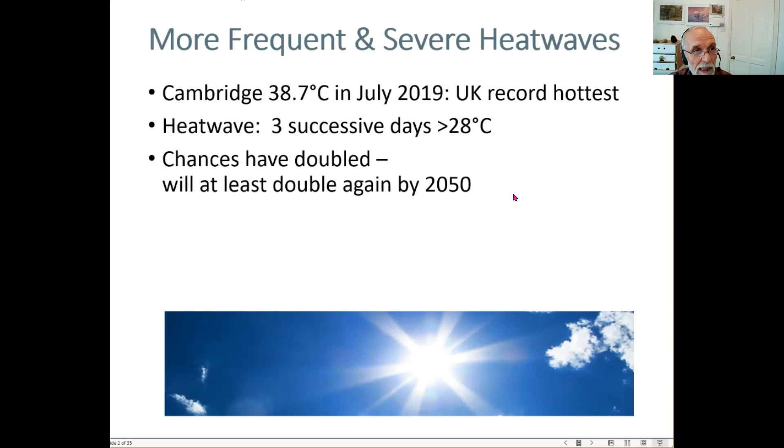The chances of heat waves have about doubled in the last few decades, and the prediction is that they will at least double again by 2050. And that's just the number of heat waves, the severity of some of them will go up again.

In 2020, there were over 2,500 deaths in England. I shouldn't be cheery about that, should I? But it's serious, and I don't want to make light of this.

We will be featuring some advice from NHS on how to keep safe. And when we have bad heat waves, we need to expect what they call cascading problems - there will be problems with health and social care.

Older people especially will be vulnerable, and children. There will be problems with transport because most of our roads are made with tarmac that melts above 50 degrees. 50 degrees may sound really hot, it's a lot more than the air temperatures I've spoken about, but dark roads will get a lot hotter than air temperature if they've got full sun on them. And electricity, business, wildlife and so on will also be affected.

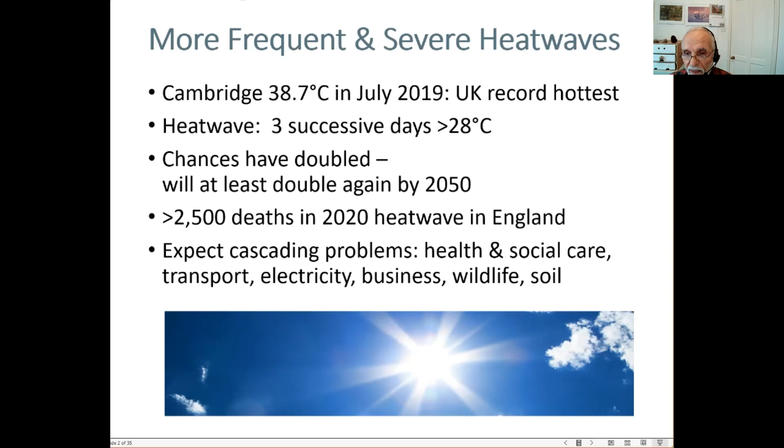Okay, right. So I'm Margaret Reynolds, and I call myself a green architect. After many years of practice, I did a master's in environmental design and building physics. For the last 20 years I've been promoting green design, with AC Architects from 2006, and then in my own practice, and I'm now a retrofit coordinator.

So we're covering a whole range of topics. Thomas just talked about the more frequent and severe heat waves, and I need to just review a couple of basics because these will help when we're looking at different house situations.

Right, so some basics about shading. Materials absorb heat, and they do it in different ways, and we call that the thermal mass of the material. I'm going to look at that, and also the seasonal and daily sun on your house, because that is part of what you'll need to consider if you're going to try and keep it cool.

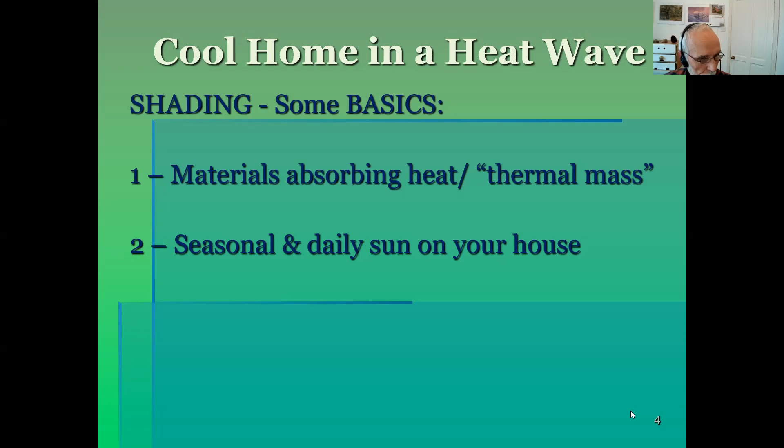So dense materials - concrete, brick, stone - absorb more heat and solar radiation, and then release it slowly. We say that they have greater thermal mass. They hold energy.

Metals, for example, absorb and release heat very quickly, so those we call conductors. Something like insulation foam or timber generally absorbs much less heat, and we say that they have less thermal mass.

Now, another thing about materials is that glass, even if it's double or triple glazing, transmits heat. And surfaces can reflect heat - if you paint your roof white, you will get less heat coming through it than dark. Foil reflects heat, so if it's on insulation, it reflects the heat. And solar film on glass can reflect the heat out, or it can reflect the heat in.

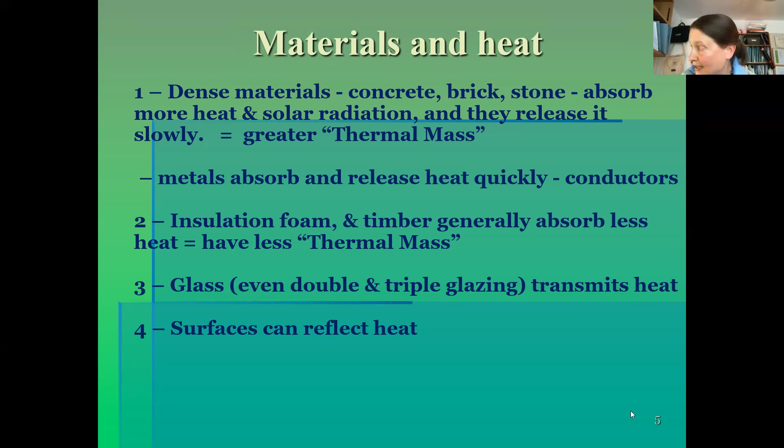So assume your house or a room in your house is cool on the morning of a heat wave. How does that heat wave heat actually get in to warm up your house? Windows are a likely route in, but how?

If the window is closed, the sun still shines through the window, as in the diagram on the left. If this direct sunlight gets through the glazing, it will shine on and be absorbed by any surface it reaches. As you can see on the photo on the left, you see the sun patches there on the floor, on the cushions.

Patches of sunlight - this surface will absorb the heat and then radiate it back into the interior of your house, and it will do that long after the sun has moved around and the window is in the shade.

So on the right is that same space with the Venetian blinds blocking the sun path. It's not making it dark, it's just blocking the sun, and all the sun patches have disappeared.

So for me, rule number one in a heat wave is we want to block what we call direct sun - that is the sun beams getting in and heating surfaces inside the room. So if early sun is absorbed by surfaces in the morning, this could cause them to radiate heat back inside the house for the rest of the day.

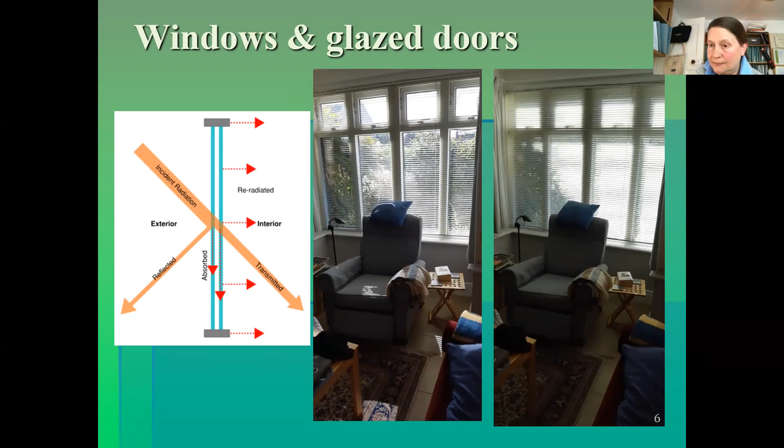To stay cool, you need to know which parts of your home receive sunlight when - by that I mean which part of the day, and I also mean which season. In this diagram at the bottom there's a building in the center, a tall one, doesn't matter. The north side of the building is almost always in the shade. On the east is the morning sun, and on the west, afternoon sun. The south tends to be much more sunny than the other directions.

In the winter, the sun path is low, so it starts in the southeast and moves to the southwest - that's the orange curve here. And in the summer, it's high - it moves from the northeast to the northwest at a high angle, and that's the red curve.

This is going to be important if you want to keep out direct sunlight. You need to know which windows you need to shade in the morning, the afternoon, and before bed. In effect, low-tech cooling like this requires developing a heat wave routine.

The other thing that's useful to know is the outdoor temperature, or at least whether it's cooler outdoors than in. This is important for natural ventilation, as you'll see - we do not want to be accidentally sucking that hot air that's outside into your house during a heat wave.

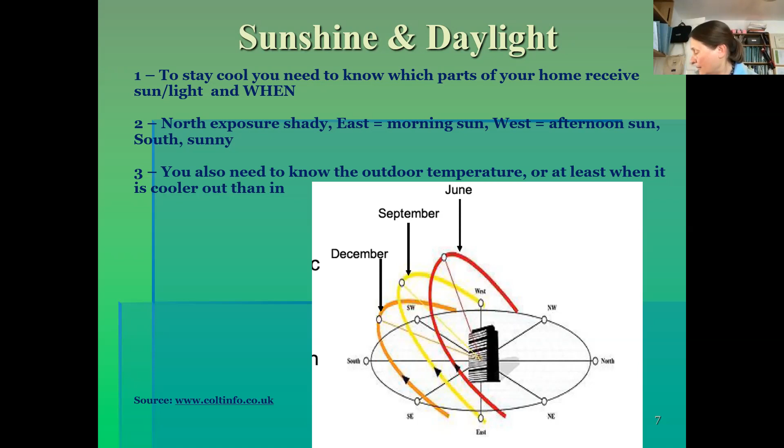So the simplest way to shade is something like roller shades or curtain fabric over the window. But then these don't satisfy my criteria - I want to be able to get light in and I want to see the view outside, but still keep the heat out. So an alternative is blinds.

Venetian vertical blinds with slats let some light in and they can allow some view out. Horizontal blinds, that is Venetian blinds, can be angled to deflect the sun, but bring plenty of daylight into the room and also permit a reasonable view out.

So here we have blinds that are closed, and then here are some that are deflecting the sun, but we can still see that there's shrubbery and things outside. And again, here's another example of a roof light that could have horizontal Venetian blinds.

However, with blinds, there are a fair number of moving parts. These have to be maintained, they have to be cleaned. And the blades themselves heat up in the sunshine, and because they're inside, they transmit that heat into the room.

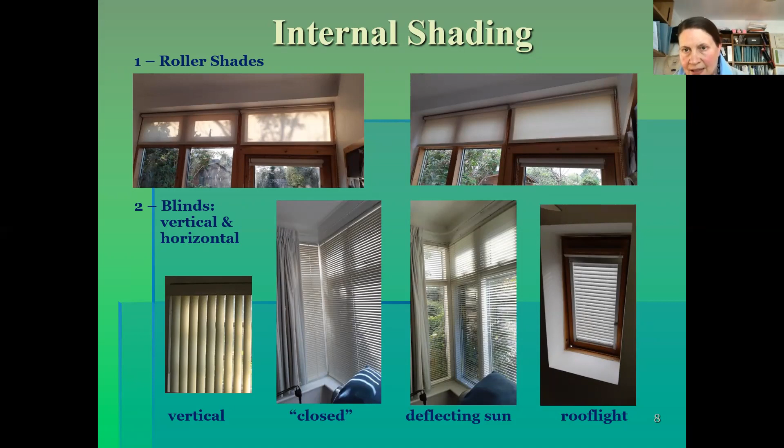So let's keep looking at this - here's some horizontal blinds that are closed. This shows you that in summertime, when the sun is high, the sun and its carrying heat could get in when you think the blinds are closed. That's what I'm saying about being at 4:30 in the morning - you really need to set those blinds to block the sun early.

In this case, if they're closed, you've got no view out. And if the sun gets on the blinds, they will heat up and warm the room as well.

So here we are with blinds horizontal - you can see out. Some of the sun is coming and hitting the blinds and being reflected onto the ceiling, so it's helping with the situation. If you set the blinds to block the sun, then you're only reflecting a tiny bit there. Your view is less good, but if you're standing up, you can tend to see out anyway.

So we'll see there are many reasons for having internal blinds, but there are also limitations.

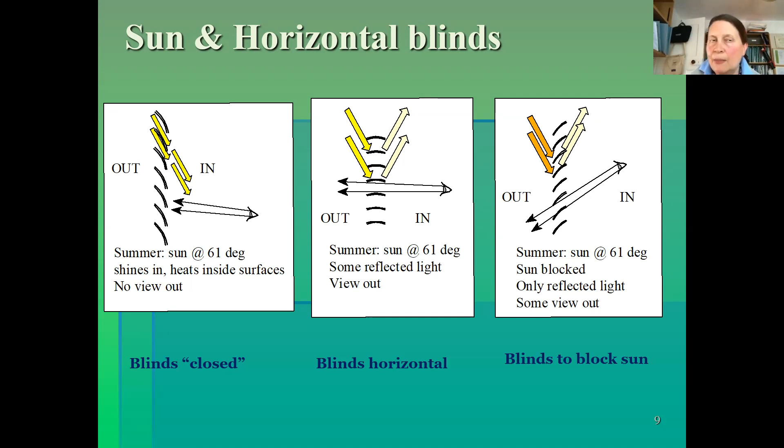In the UK, inward opening windows are very rare. For whatever reason, shutters are expensive in this country. They're very common on the continent, but we don't often find them here.

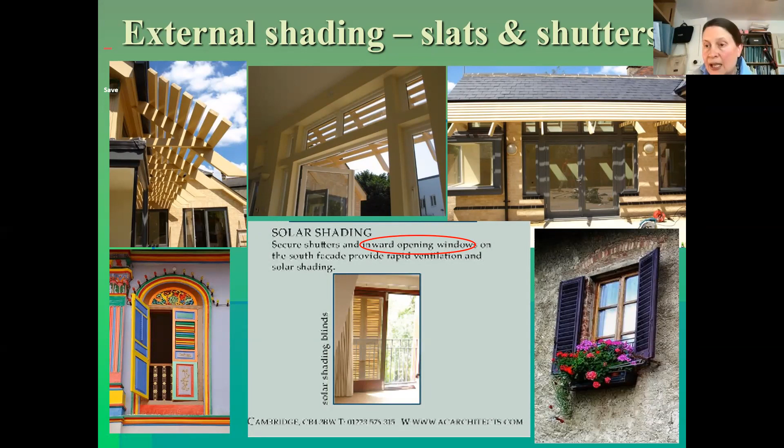So these awnings stop the heat reaching the window frame and the glass, but they still provide light and a view. And often it is at roof level that we get the most heat coming in.

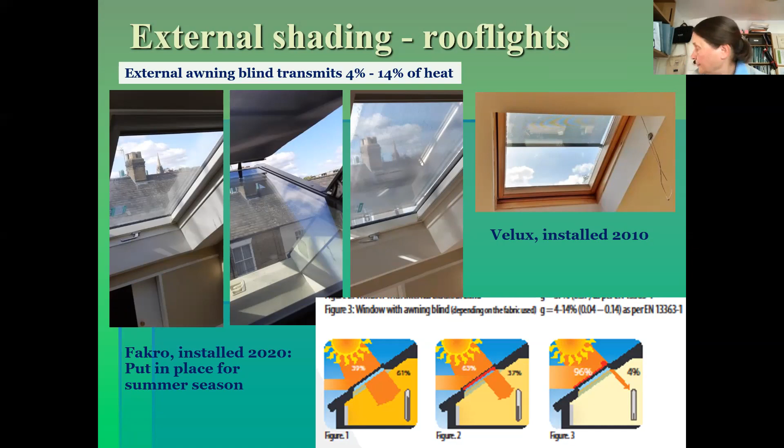External awnings for windows made of see-through heat blocking material like this mesh are not easily obtained in this country, although we are continuing to pursue this. Here are some alternative solutions.

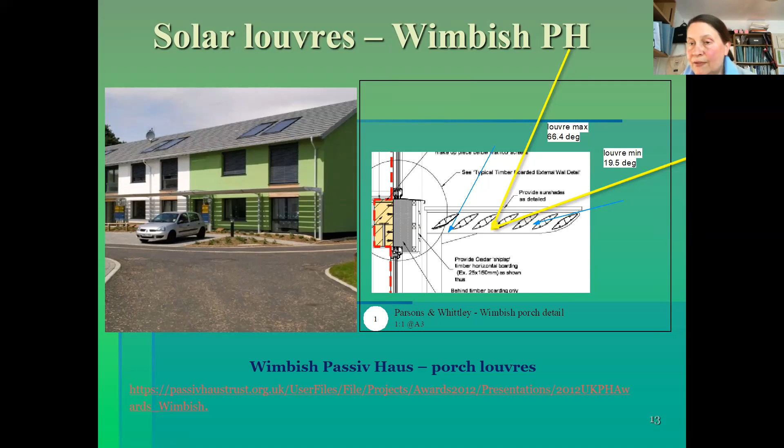This shows on the 21st of June, at the summer solstice, as the sun gets higher and higher, they effectively shade the entire wall, right down to the bottom of the glazed door. So that's quite a clever way to do it. But of course, by August, the shading isn't as good, and August can still be very hot.

So we're going to move on and summarize: when you talk about shading, you need to know when and where the sun is, and make yourself a routine for blocking it from getting into your house. There are all kinds of advantages and disadvantages to internal shading and external shading.

Now Derek is going to speak about his own solution for awnings and blinds, which is very interesting, that he's developed over the last few years. Let me make sure I'm getting the right slides here. Okay, so over to you, Derek.

Basically, our house is orientated southeast, southwest, so we get the sun full on in the morning and full on in the afternoon at the front. The side of the house has got no windows in it, it just absorbs heat. So the house is well insulated.

So what we decided to do was basically throw some pound notes at the solution, and we invested in an electrically operated blind over two-thirds of the back of the house, over the kitchen. It comes out when it's sunny, goes in when it's not, and if it's windy it won't come out at all, or if it blows while it's out, it will retract. The blind's 5 meters wide by 3 meters deep, so it gives a huge amount of area.

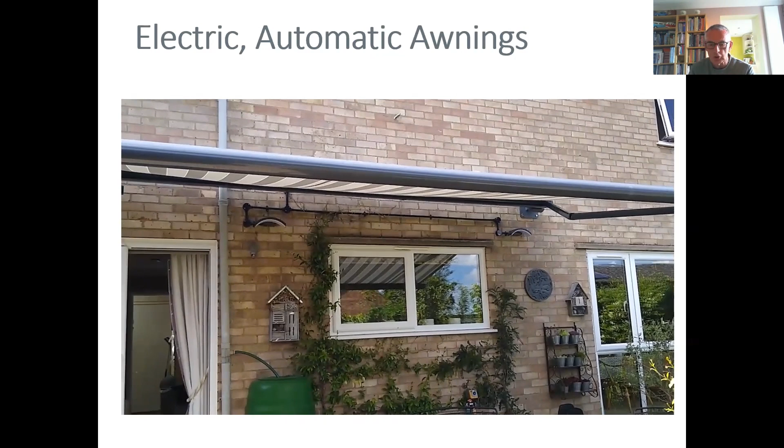I think, Tom, if you press a button, it'll do something. Ready? Okay, you want to move on? Just press a button, and yes, here it goes. This takes about 30 seconds to come out. I was a bit concerned about it in the wind, and when the installers came I said I'm a bit concerned about it, and he stood on the chair and shook it, and it didn't do anything. You can see the amount of area.

To the top left-hand corner is a little wind and solar operated controller, which will send the blind out and will send it in if it's windy.

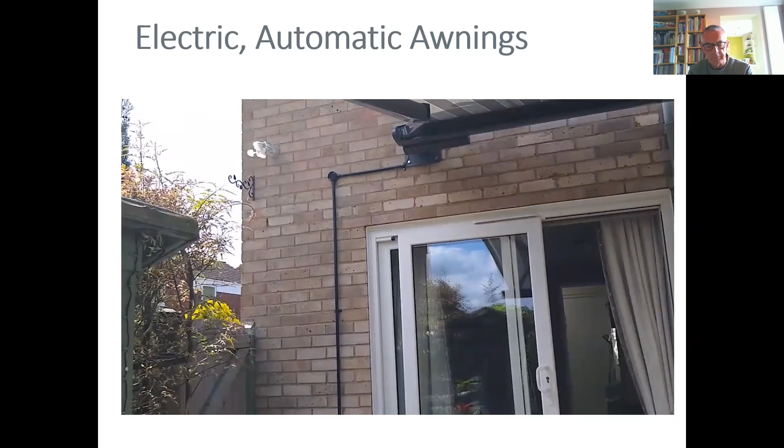These blinds will come out at 6 o'clock in the morning. I don't do anything, I don't have to worry, it just does it. The key to it is getting the things out early rather than letting the sun come in.

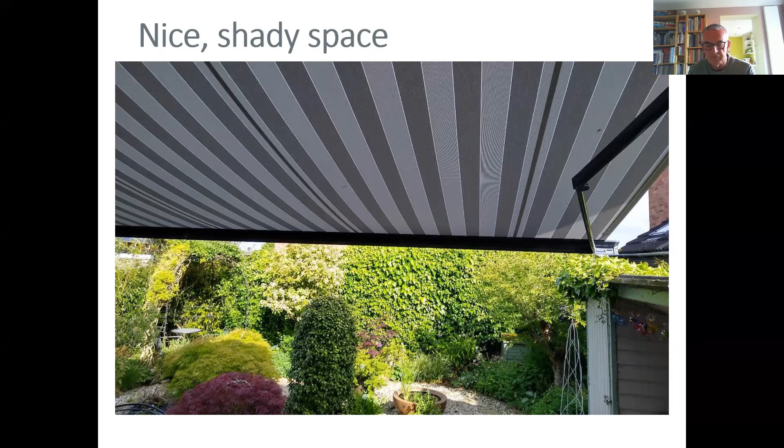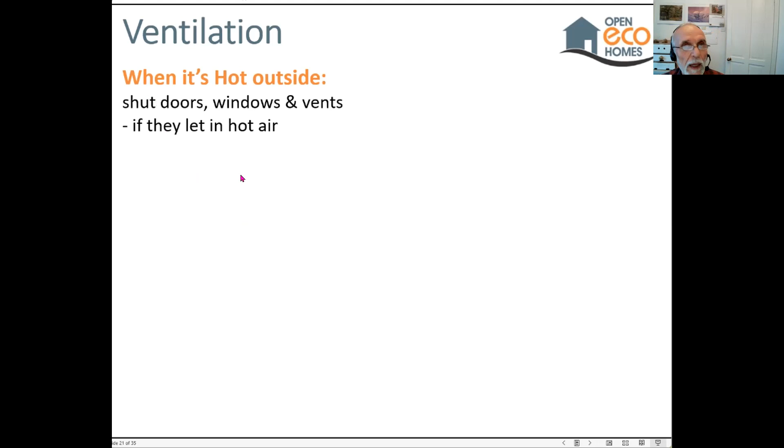Then the next thing is, when it's cooler outside, particularly at night, it's really powerful if you can flush your house with cool air to get the whole fabric of the house cooled down. If you're on two or more stories, then if you've got a tall house, it's great if you can open windows or skylights at the top, and also open vents or windows at the bottom of the house. Then you will get a kind of chimney effect where the warm air rises out of the top of the house and the cool air is drawn in.

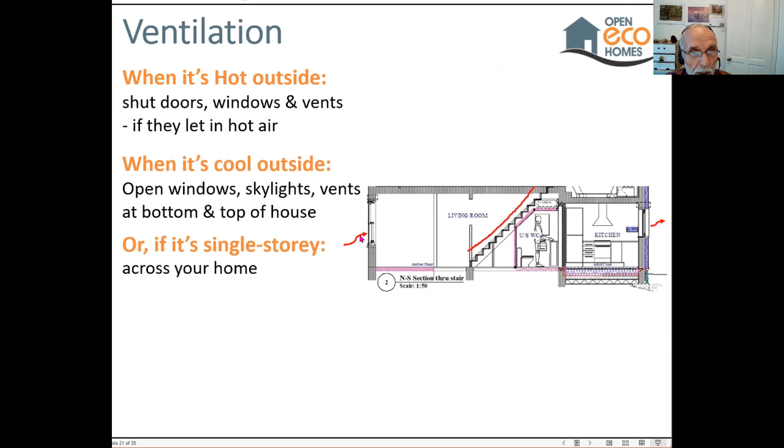Best to open windows at the bottom that are on a cool side of the house. But of course, maybe you're on a single story apartment or bungalow, and so you don't then have the opportunity of having your whole house as a chimney. So there, ideally, try to get through ventilation. If you can open windows or vents or even doors on both sides, on opposite sides of your house or apartment, then you're trying to get through ventilation to go from one side to the other.

Often the people who suffer worst in heat waves are people in single aspect flats. These are flats where you only have windows on one side. And so that can be quite an issue, as you can imagine.

It's a real challenge. If you have a window which can open at the top and the bottom, then that's good. You will get some circulation like this, with hot air going out of the top, presumably, or hopefully. But we've thermal imaged some flats where people were having a problem.

There was solar thermal on the roof of this block of flats. Hot pipes from that solar thermal, being very effective in the summer, were coming down through the back of their flat, and they were poorly insulated. So I think they've been improved with insulation now, but anyway, that can be a big problem.

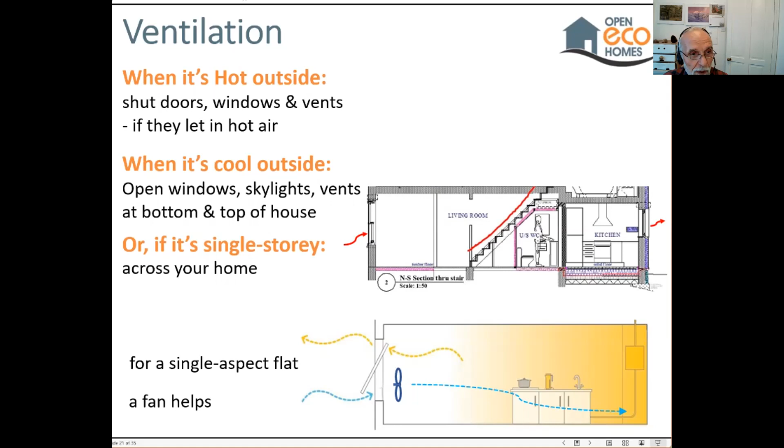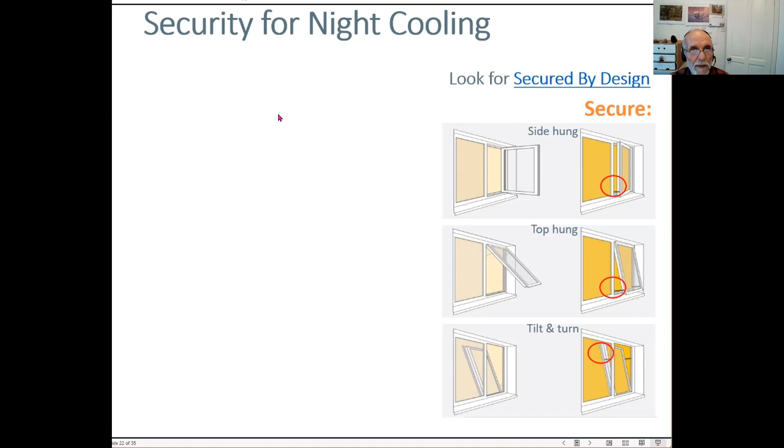Okay, but of course, you may have problems as to whether you're able to open the windows you'd like to, due to security. Obviously, if your house gives onto a street, you're not going to open the windows wide like this. But for most kinds of window, you can get security fittings like these that restrict the opening of the window. This Secured By Design features specifications for windows and doors that have these kind of security features.

Sash windows too have various means of security, this is called a Ventlock, which when this button comes out like that, as you can imagine, stops the sash window opening more than whatever it's set to. And so that gives you a convenient way of opening it a bit, but in a secure way. Another reason might be that outside you have a problem with noise or air pollution.

Again, that's going to make this more difficult to try and get good ventilation at night. But it's a winner if you can do this: cool off your house before the next hot day.

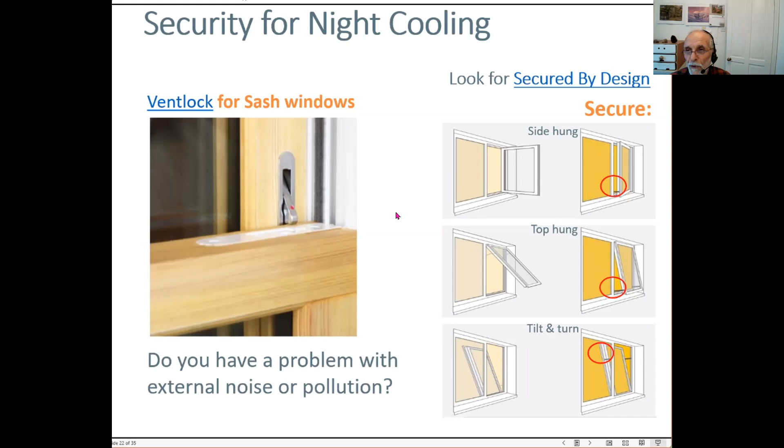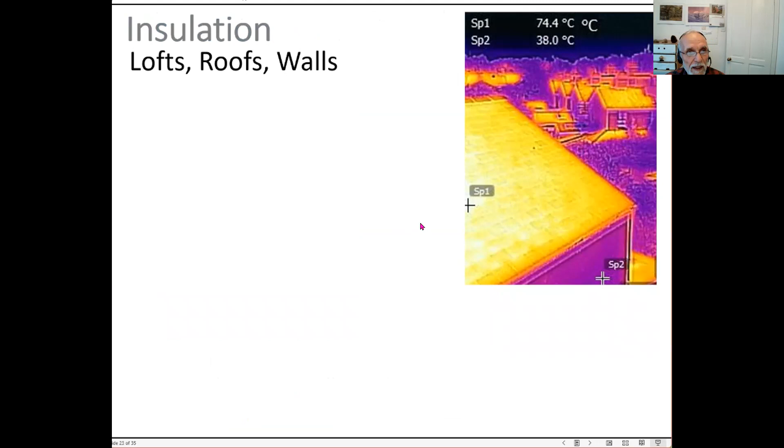So a little about insulation now. Here is a thermal image showing that this slate roof is at 74 degrees on a hot day. This is really hot, nearly hot enough to fry an egg. So you can imagine that in the loft below this, it's also getting baking hot.

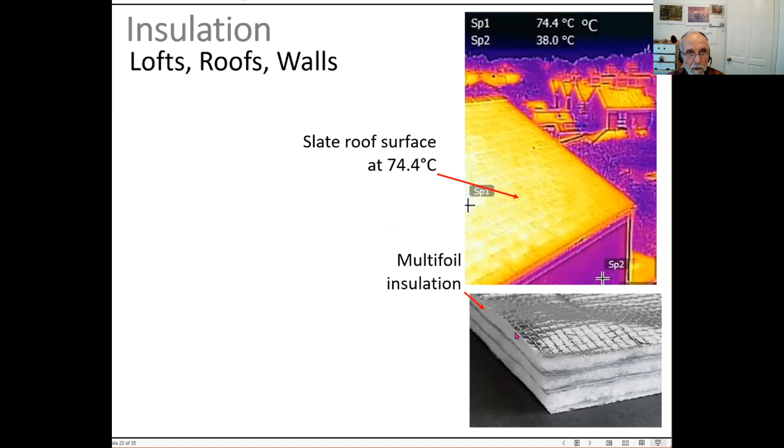And you may want to be insulating if you're in that situation. There's a kind of insulation called multifoil insulation, where you have a reflective surface, then a thin layer, then another reflective surface - in this case a stack of 4 reflective surfaces. If you had multifoil like this, either under the roof or across the floor of the loft, maybe on top of existing insulation, multifoil is good at reflecting radiant heat. If you have a hot roof above you, the main way it will be heating your house is by radiating heat downwards, because convection doesn't really transfer heat in a downwards direction.

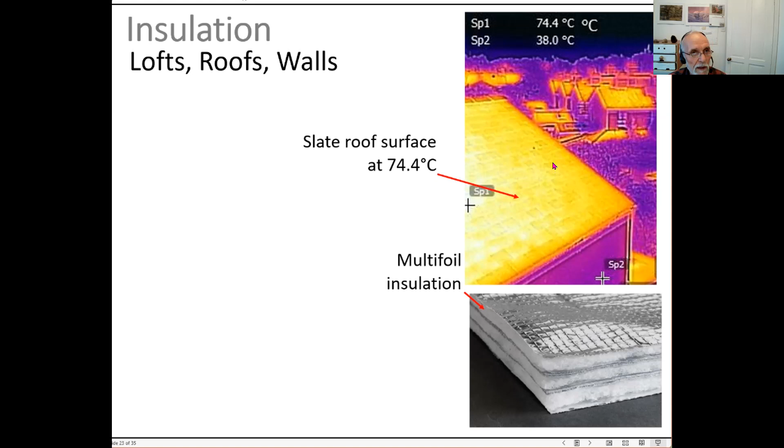Another thing you may need to be insulating is hot pipes or a hot water tank if you have one. You really don't want these hot pipes adding to the uncomfortable heat of your home in a heat wave, so insulate them. Of course this insulation will also be reducing your energy bills in the winter when otherwise you're using more heat than you really need.

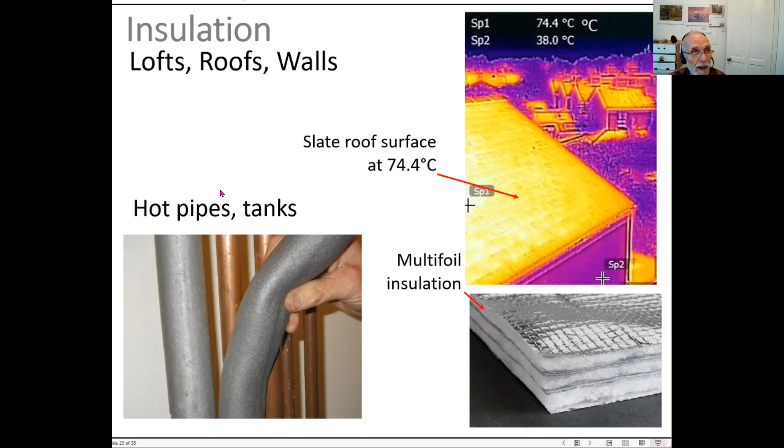So a little more on thermal mass that Margaret mentioned. Brick, stone, concrete - these are the kind of weighty building materials that have a lot of thermal mass, but their effect can be useful because they steady the temperature.

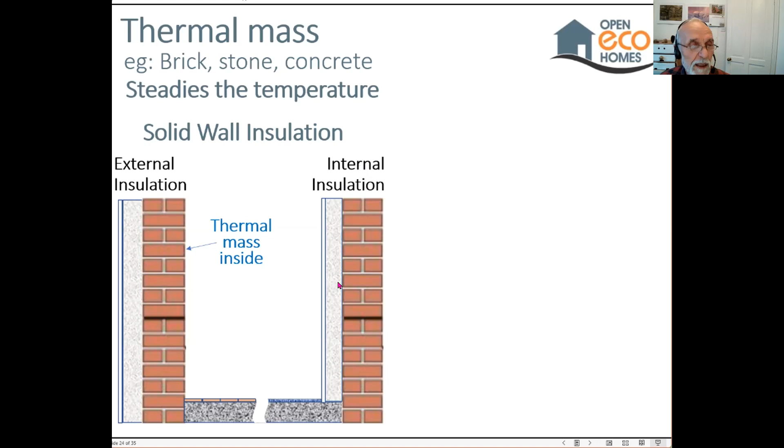Just thinking about solid wall insulation, this is an example with external insulation outside this big brick wall. This brick wall will have a lot of thermal mass, and because it's external insulation, that will have a very useful effect on steadying the temperature in this room, where you've got thermal mass inside. This is slightly in contrast to if you've got internal insulation inside your wall - then a room like this will heat up and down quite quickly.

Sometimes that may be an advantage if you want to be able to get home from work and quickly heat your house. But it will also tend to be less comfortable in a heat wave - the house with external insulation will tend to have a steadier temperature, less of the hot peaks during a heat wave.

And so just pointing out here that carpets are insulation too - not like serious wall insulation, but in this situation, if you've got a concrete floor on your ground floor, you may be wise to cover it with tiles rather than carpets, because that will then make you more connected to the thermal mass of your solid floor.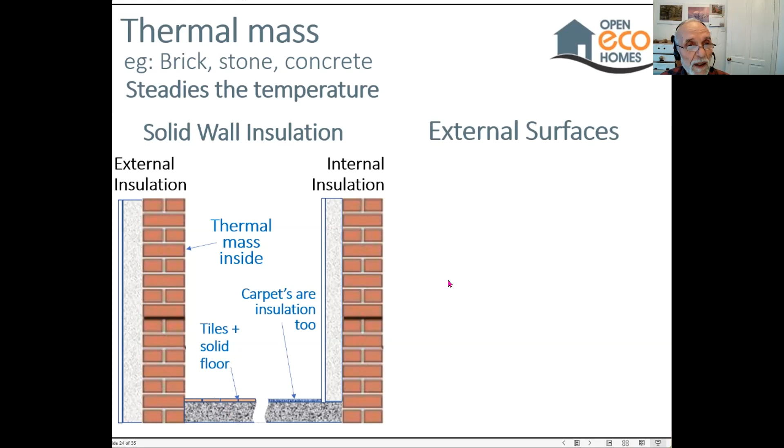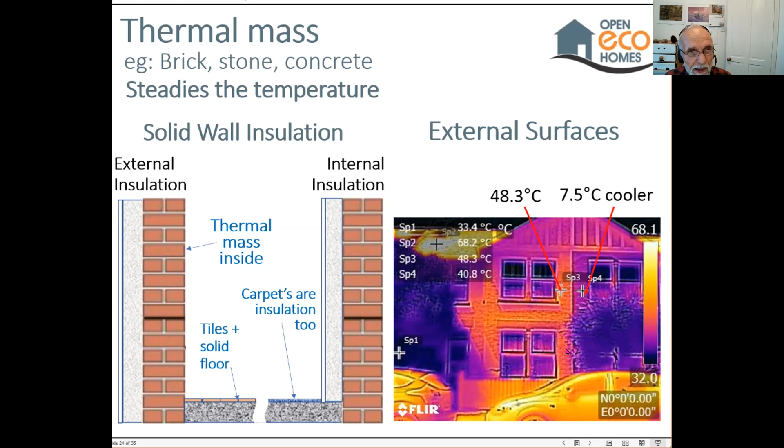So just going back, here's the thermal image, and here is the paint showing the white paint. In general, if you can have light colors or white colors to your walls or your roofs - even though it's not common in Britain, I don't know what you'd need for planning permission to have a white painted roof, maybe if you've got a flat roof, something like that - it can make quite a difference.

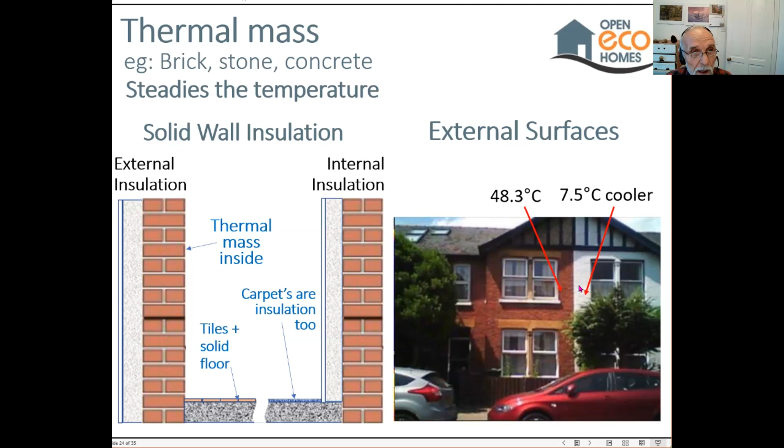So finally, in this section I'm going to talk about accidental heating. This is a diagram I borrowed where the places with the number 4 are highlighting ways in which you might be heating your house in a heat wave, in ways it's good to try and avoid.

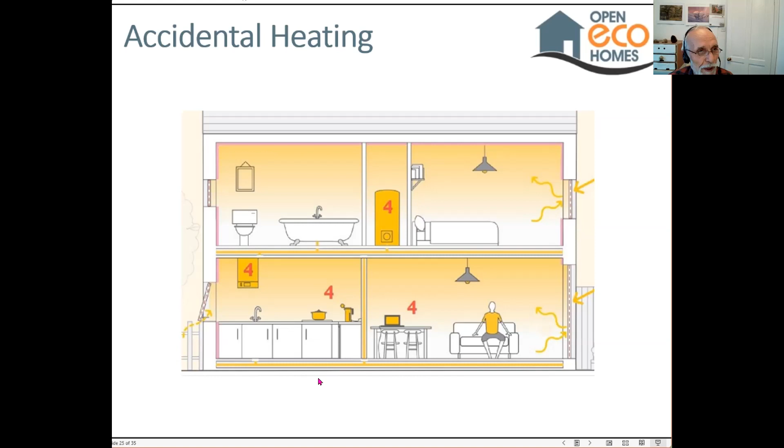You may have a boiler mounted inside your home. Presumably you haven't got the central heating turning on, but this will be running when you're using hot water, and if it's free in a room, that may be heating this room in a way you'd rather not.

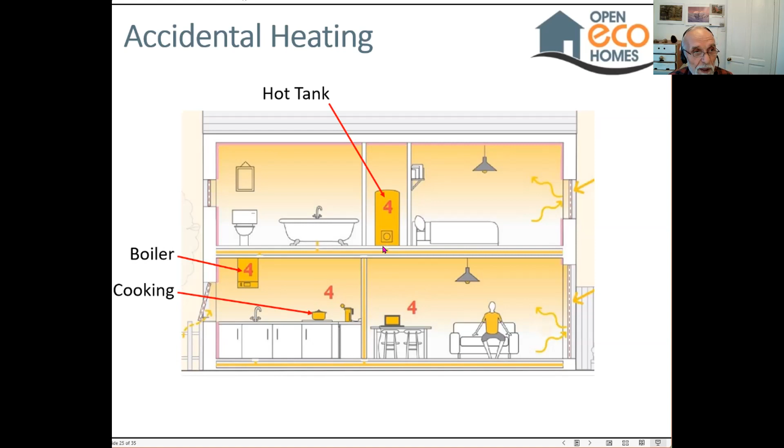And of course doing cooking, you probably still want to cook, but here is a reason to be eating cool food like salads during a heat wave. If you're doing a lot of cooking, that's going to warm up the kitchen in a way you'd maybe rather not. Similarly, if you have a hot water tank, the key thing is to insulate it well, and if you've got hot pipes carrying water around when you run the tap, insulate those wherever you can.

Of course there's laptops, TVs, etc., giving off accidental heat. I think this diagram misses out another important category, your appliances. So if you can avoid particularly using your tumble dryer during a heat wave, it's a really good opportunity to be drying your clothes outside. Other appliances like the washing machine on a hot wash will also be heating your home in a way you'd rather not.

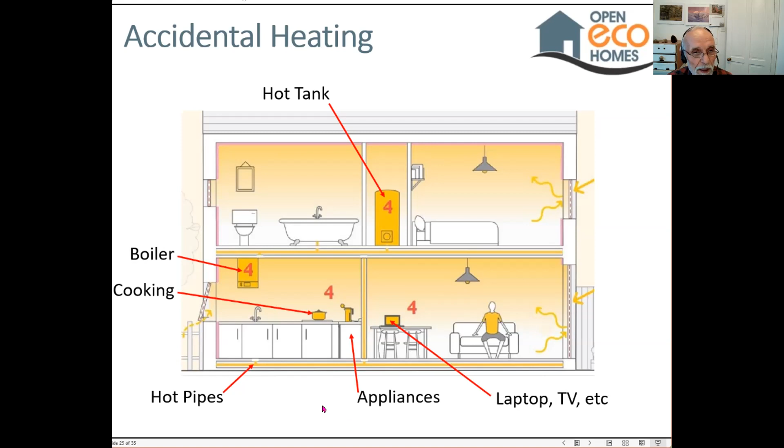Another way of doing this in the longer term is to choose energy efficient appliances, because things that aren't energy efficient are usually giving off the rest of the electricity they use as heat, which you'd probably like to avoid. You can get a good feel of this by looking at the energy labels, but the labeling system changed last year.

In the old system, it started off with levels A, B, C, and D, D being the worst. Then that extended, so to A+, and now A+++. It was getting a bit much, so the EU have rearranged how these labels work.

So now with a new appliance, look out for this kind of label. These are the old and new labels for the same fridge. As a comparison, this particular fridge was an A+++, and now in the new scale, which has all been rescaled, that is now a C. So there is room for appliances B and A, which are better than the old A+++. The calculation method has changed a bit, so that's not a big deal, but this fridge is now believed to consume 66 kilowatt hours per year typically.

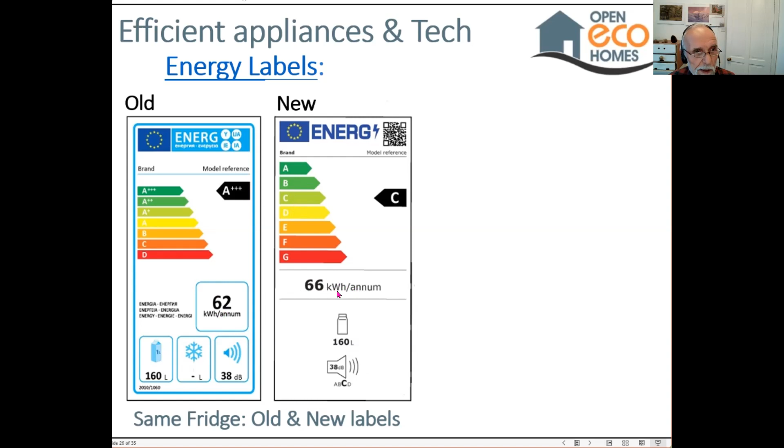The other thing you get in the new energy label is a QR code in the corner, and if you scan that you'll get more information about that particular appliance. I'll just remind you again, I'm sure you know about switching things off when they're not in use. It's easy to say.

I'm hearing somebody with a dog - I don't know if you can mute. So, here's a good place.

You can click on these links in the PDF of the slides. I recommend a website called Sust-it, and they rate all kinds of appliances and electronics, not just the ones shown here. They don't belong to any branch of the industry - they're truly independent.

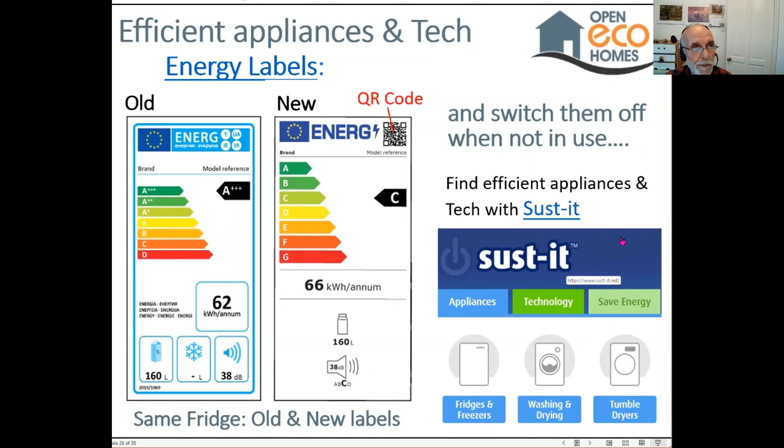One other thing that may be important and useful is to think about personal cooling. This isn't so much to do with your home and its energy, and some of these are obvious: drinks, cool showers, fans, spraying yourself with water will all really help you stay cool, as will wearing loose, light-fitting clothes, and if you go outside, having a hat with a wide brim really helps.

Here's a little tip I only tried for the first time during our last heat wave. You take a hot water bottle - don't fill it to the brim with water, because when water freezes it expands, and that would definitely tear your hot water bottle. But if it's nearly full with water, put it in the freezer and then go to bed with it. It's remarkably good at keeping you cool through the night, having the ice in your hot water bottle carries on keeping you cool.

If it feels too cold, then wrap it up in something else. Maybe you can consider sleeping where it's cooler - maybe there is a shady room on a different floor, perhaps the ground floor, where it will stay cooler at night.

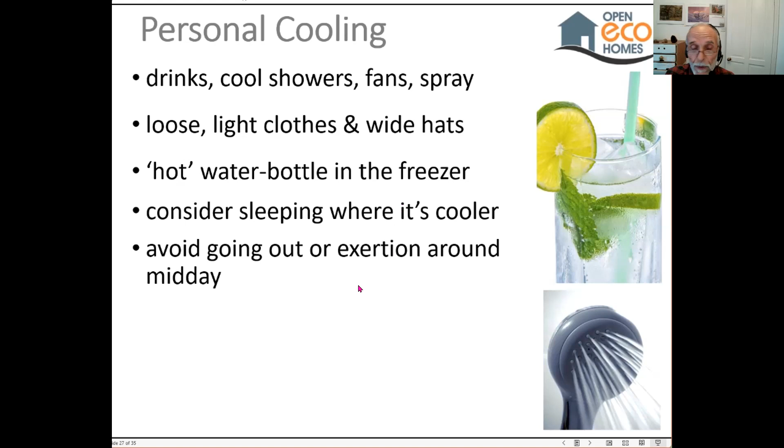Around midday or in the early afternoon, when it's hottest outside, it's good to avoid going out or exerting yourself. This link will lead you to some NHS advice about heat exhaustion and heat stroke, and how to avoid them. Maybe you can also look out for your neighbours, particularly elderly neighbours or young children, who are more vulnerable to heat stroke and exhaustion. Or maybe you know somebody living in a house or flat that's hard to keep cool - you could invite them round to cool off in your house.

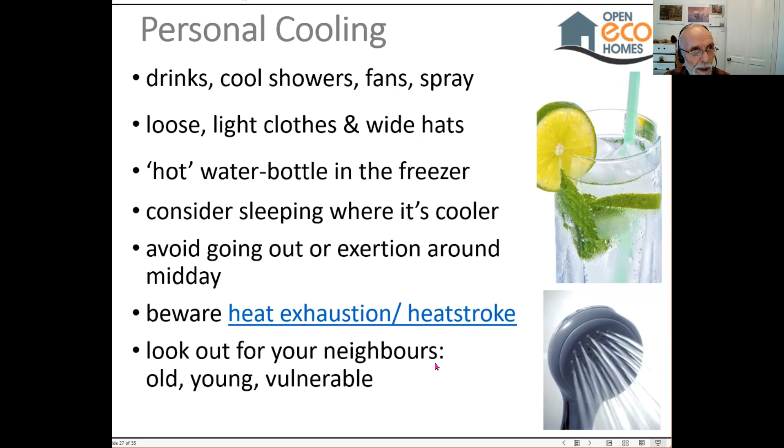Shall I carry on and show the first of your slides about using a garden? Margaret, can you talk to this? Okay, I just wanted to add a few thoughts about gardens.

The way we get cooling typically comes from evaporating water - it absorbs heat as it dries up. You can actually use this evaporation to make your garden cool, because leaves transpire, meaning they release the water they've taken up through the roots and stem in the form of vapour through the leaves.

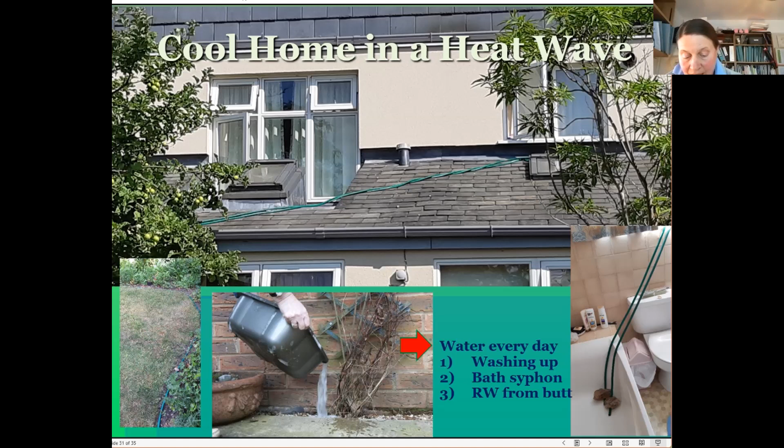So, next slide. If you're going to store moisture in your garden, ideally you want to hold it in for maximum benefit to the plants.

Once you've got a culture going, you can tip about two-thirds of it out onto a tarp or sheet and put it around your plants, and that really does hold in the moisture. And of course, there's lots of nutrients for your plants too. By the way, I find that birds, we have lots of birds in our garden, love to peck at the compost, so presumably there's still nutrients in it.